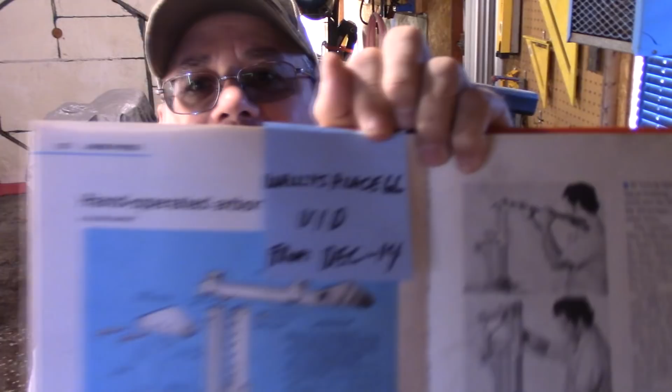And oh yeah, there's the guy, see? There we go. So we got Wally's Place 66. That's from the vid from December the 14th. I was talking to Wally in the comments there, and he's seen this when I was talking about my diesel heater and my electric heater right here. And he said I wouldn't mind taking a look at that. So I said, okay.

So this is it right here, and here's the plans on 2 pages. I'll take a photograph of this and I'll put them at the back. So if you guys are interested in building something like this, well then, just go right at her. Because you know what? When I first started welding, I did this all with a stick welder, and it turned out great. I've been using it all these years, and it's been flawless.

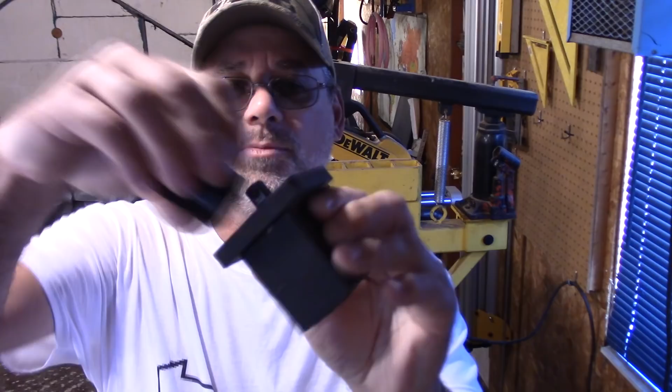So let's just take a little look at it here first, but I just thought I'd show you some of the little tools that I've made, like little jigs that I made. This one right here, you just put like you can put your socket on top, you know, to press out different things. And all it is, an old ratchet drive that's welded in there.

And that's very simple. And this one here, this is just for making bends in steel. And these all go into this chuck right here. They all go into here. I'll show you this right here. It's just a little set screw. You can take it out.

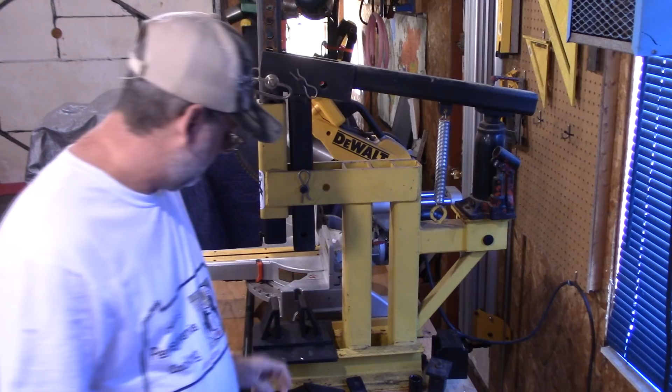And this one here I got just for bending steel. And I made this little jig here. You know, you got to have some kind of a platform. And this here is a special press. This is a Robinson Automotive ball joint, not ball joint, universal joint. There, it's right on there. Don't get no easier than that, does it?

And I use this all the time in here, and it works out terrific. But yeah, it's very simple. And guys, you know, I'll show you here. I got like a little... This is just like an old piece of pipe, guys, and I just narrowed it down and just tighten up your bottle jack. And guys, you can just press this away like there's no tomorrow.

And of course, I'll show you here so you can get a better example of what's going on. The fulcrum is so powerful on this that you can pump away for a long time, and the end here will not move that much, but it's got a lot of power.

And also, you can take out the pin and swing this whole head over and use it manually. You know, like with a bar, and inside of here I got another pipe in there, and you can just use it manually instead of using the bottle jack. But for a lot of stuff like universal joints, you know, bearings and that kind of stuff, yeah, you need a lot of power, and you're going to need the bottle jack.

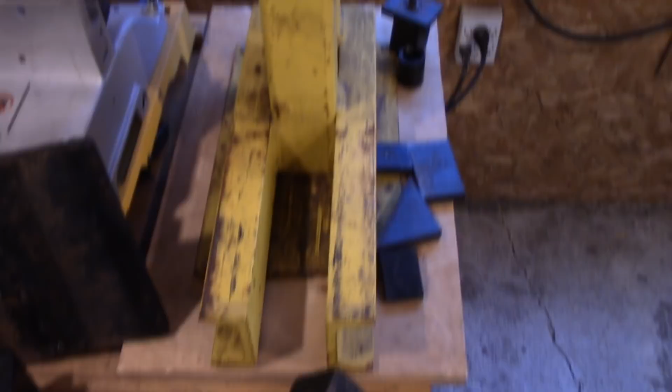Okay, I've taken all the pieces off here so you can get a better idea. And guys, this is real simple. You know, you're not going to get that sticker with it either. That's a custom sticker. And you can see how this is made.

And guys, it's very simple to do. And it's square. Like everything in here is square, and it's simple, and it's easy to weld up. And guys, I think anybody with a little bit of skill at all can do one of these.

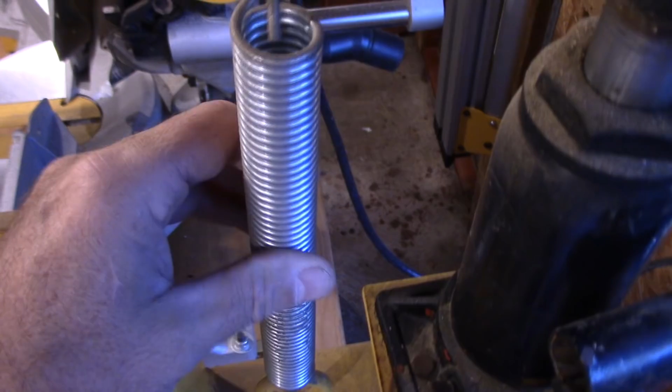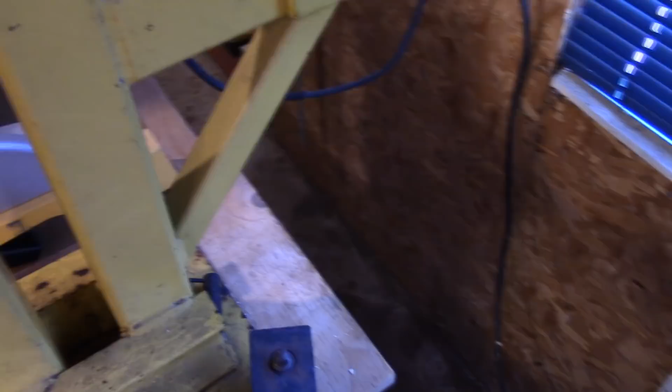And I just got this spring here from Princess Auto, and yeah, they're easy to find. Like all these parts are easy to find. I just welded on a little eyelet here, you know. And guys, this is just a terrific unit to make, and a nice little thing that you can make during the wintertime as a hobby, and it'll last you a lifetime like it has me.

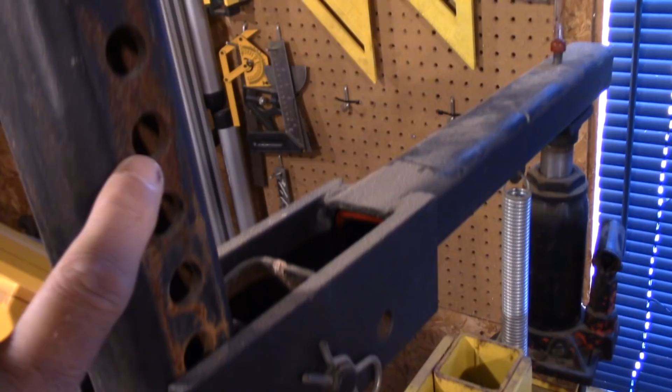Now you can see here that you have different locations where you can put your pin in to get a different throw on your fulcrum. You just take this out, and guys, this is the ideal setup. Has to be a 50-year-old design, but you know what? Sometimes 50-year-old stuff is 50 years good.

Well, I hope you like that. It's a nice project to do, and I think really, guys, most people could handle this. Yeah, you're going to have some tools to cut these pieces off, but sometimes, you know, you go to a lot of these steel places where you buy your steel and they will pre-cut all this stuff for you. Just give them a cut-off list, and I'll show in the book here, you know, the pictures at the end here, so if you want, you can see exactly how this is all done. And I only went by these instructions, so I think everybody else can.